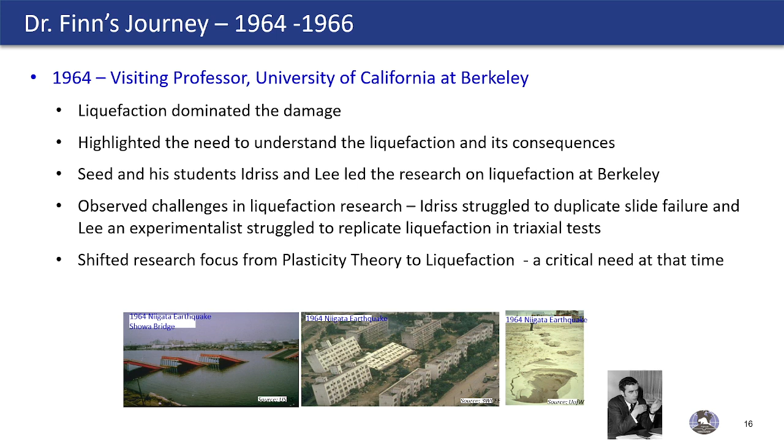So he shifted his focus from plasticity theory to liquefaction - it was a critical need at the time. He returned in 1966 to UBC, acquired funding, and commenced his research in liquefaction, establishing a soil dynamics laboratory with a shake table.

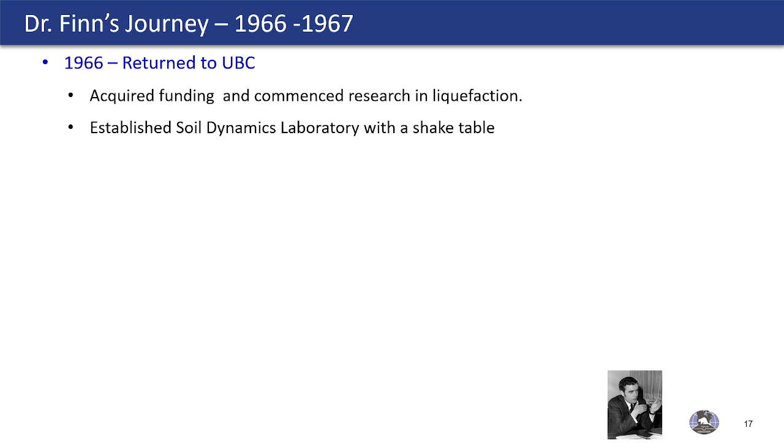In 1966-67, Dr. Finn published a paper on the static and seismic analysis of a dam using finite elements. This publication showed the power and the potential of the finite element method at the time, even with the limitations in memory and computing power compared to what we have today.

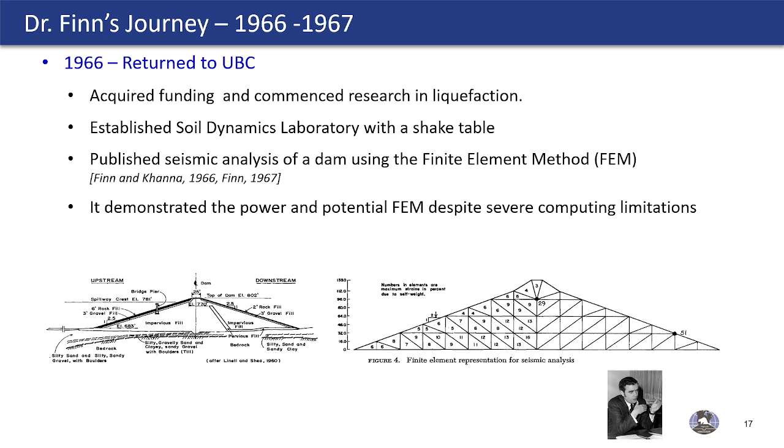That actually led him to go to the Soviet Union to work for a few months, analyzing a very large rock-filled dam which was going to be built in Georgia.

In the meantime, from 1964 to 71, at UC Berkeley, Harry Seed and his colleagues continued their work and developed these programs you're all familiar with: Shake, Quad4, and Flush. Shake is for one-dimensional site response analysis, Quad4 is for two-dimensional finite element analysis of embankments with variable damping, which was a nice feature at the time, and Flush is for soil-structure interaction analysis.

But all these programs used a total stress-based equivalent linear model, while soil actually exhibits nonlinear hysteretic behavior and also develops pore water pressure.

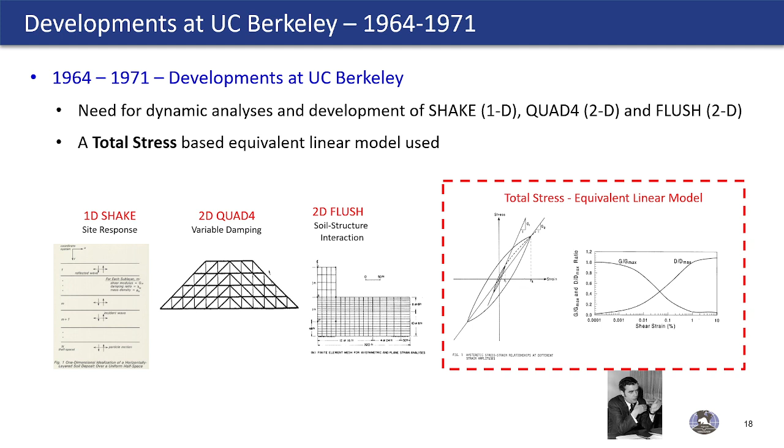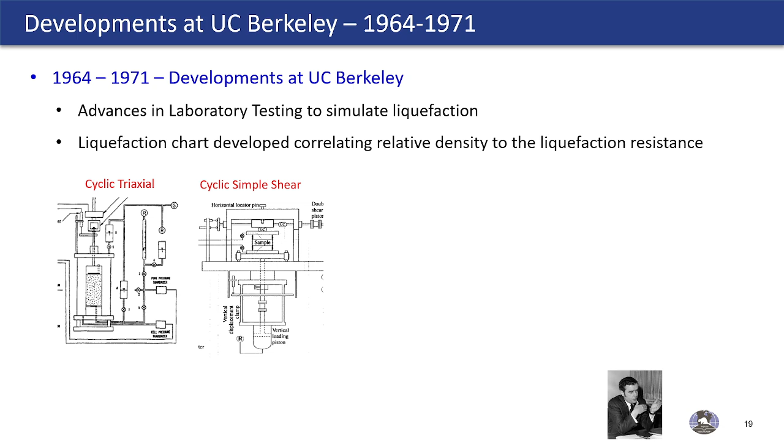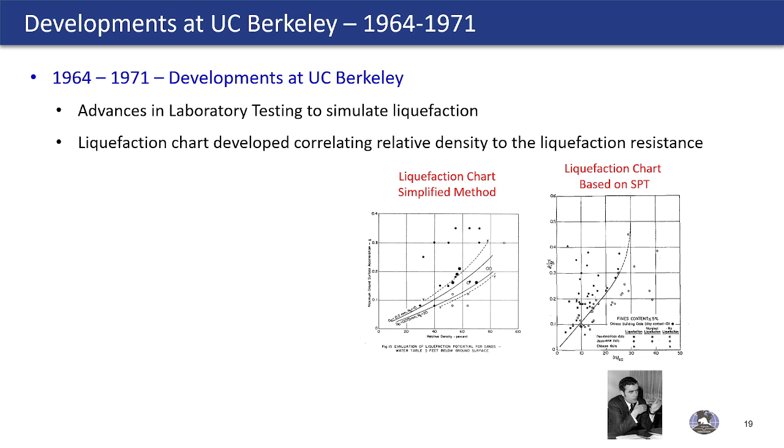At California Berkeley, they also continued their research simulating liquefaction in cyclic triaxial and simple shear tests. They developed their first liquefaction chart by relating the pore pressure ratio with the relative density, and subsequently, much later in the mid-80s, they developed their first liquefaction chart using the Seed simplified method, relating cyclic resistance to SPT N160. This was the predecessor for the current liquefaction chart.

Then came the 1971 San Fernando M6.6 earthquake. This earthquake occurred about 11 kilometers from the San Fernando Dam, which is located about 30 kilometers north of Los Angeles.

The lower San Fernando Dam experienced severe damage. The pre-earthquake freeboard of about 11 meters was reduced to only 1.5 meters, which prevented the dam breach. The upper San Fernando Dam also experienced some displacements in the order of 1 to 2 meters.

You can see on the right-hand side the configuration before and after the failure, because the significant movement caused a drop of freeboard from 10 meters to 1.5 meters.

This 1971 earthquake exposed the weakness in the total stress-based equivalent linear models. Dr. Finn recognized the need for an effective stress nonlinear model, because soil exhibits nonlinear hysteretic behavior and develops pore water pressure, and because of the development of pore water pressure, the effective stress reduces. When the effective stress reduces, stiffness and strength reduce, which causes liquefaction.

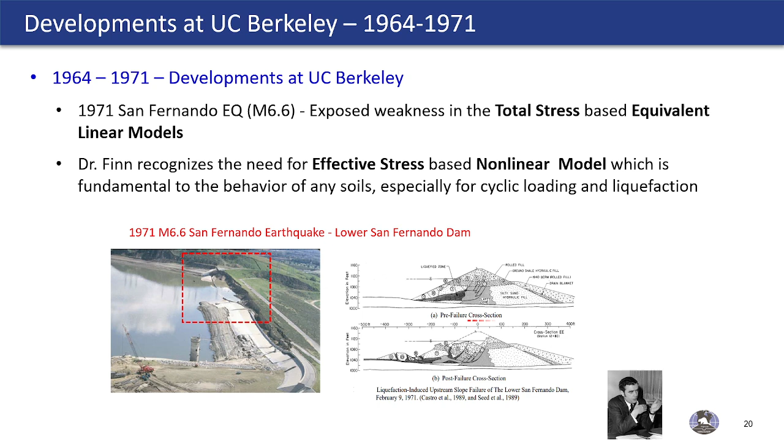So in 1975, Dr. Finn made a landmark contribution to liquefaction with the development of his model called the Martin-Finn-Seed model, or MFS model. This model can predict the pore water pressure during shaking or cyclic loading.

This was undeniably a significant breakthrough in capturing the mechanics of liquefaction and the dynamic response, something that was missed in all total stress-based equivalent linear models.

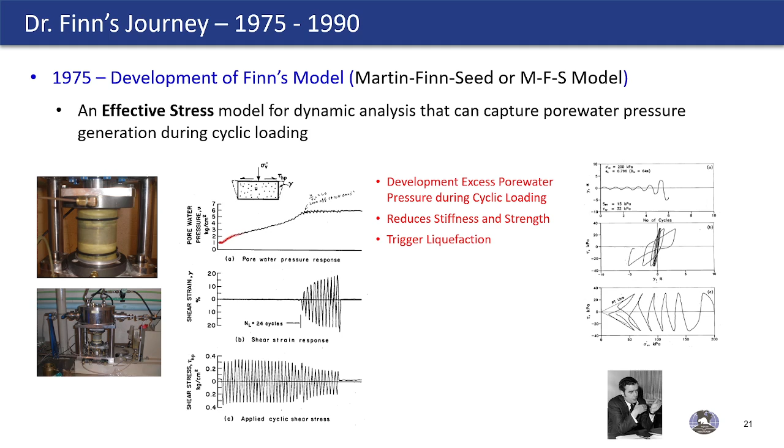Let's look at this MFS model. The first equation shows the relationship between the incremental volumetric strain, expressed as a function of the shear strain amplitude, and the accumulated volumetric strain, basically expressing the shear-volume coupling, which was captured in this equation with four coefficients, C1 to C4.

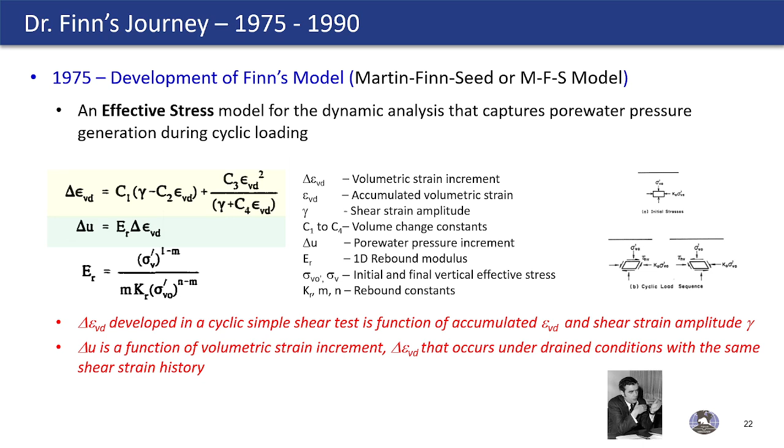The corresponding pore water pressure can be expressed as a function of that volumetric strain with the rebound modulus. It's a very simple model, but elegant, and it could capture pore water pressure generation during cyclic loading, which was important in the dynamic behavior of soils. The figure on the left shows the relationship between the pore water pressure ratio and the volumetric strain, and the figure on the right shows the number of cycles versus the pore water pressure ratio.

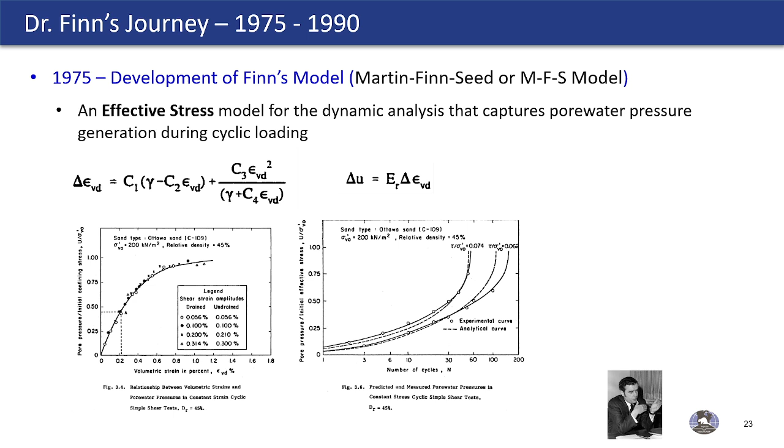So between 1975 and 1980, Dr. Finn spent time implementing his MFS model in computer programs that actually changed the practice at the time.

The first one was DESRA-2, which was developed in 1975. It can do both total and effective stress site response analysis. In DESRA-2, a hyperbolic stress-strain model was used, and the Masing criterion was used for the unloading and reloading part. Dr. Finn extended this Masing criterion to capture the irregular cyclic loading typical of earthquakes.

This figure shows a typical output from the DESRA, starting from the top: input motion, shear stress time history, shear strain time history, and the pore pressure. You can see that this particular program can capture the increase in pore water pressure and the liquefaction triggering. The figure on the right shows the stress strain loops during that earthquake loading, and you can see it is not an equivalent linear model, it is a nonlinear hysteretic model.

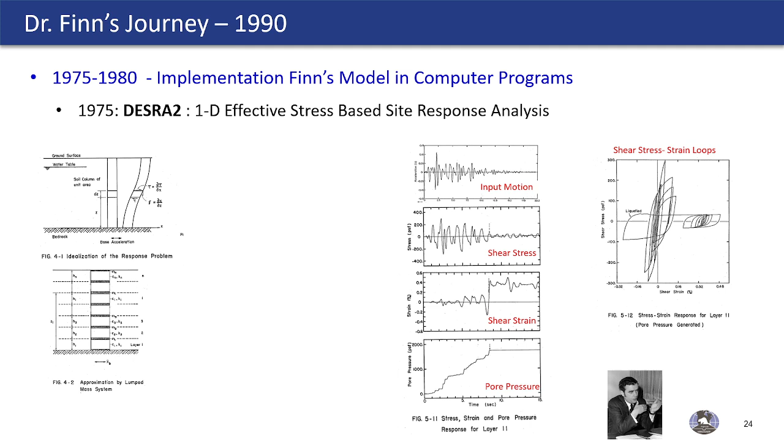In 1982 he developed TARA 1, a total stress program, and TARA 2, the effective stress program. In 1986 he enhanced TARA 2 to come up with TARA 3, with some extended capabilities.

When we develop this program and the model, it needs to be calibrated using element tests like a cyclic simple shear or triaxial, or some full-scale test or centrifuge test. This particular program was validated using centrifuge test results from the University of Cambridge.

In 1988, he developed this program called TARA 3FL, to capture the post-liquefaction, large deformation, large strain response of the embankment dam. In that one, he used a very simple model, but incorporated the post-liquefaction residual strength to capture the post-liquefaction deformation using the large strain formulation, the Lagrangian formulation.

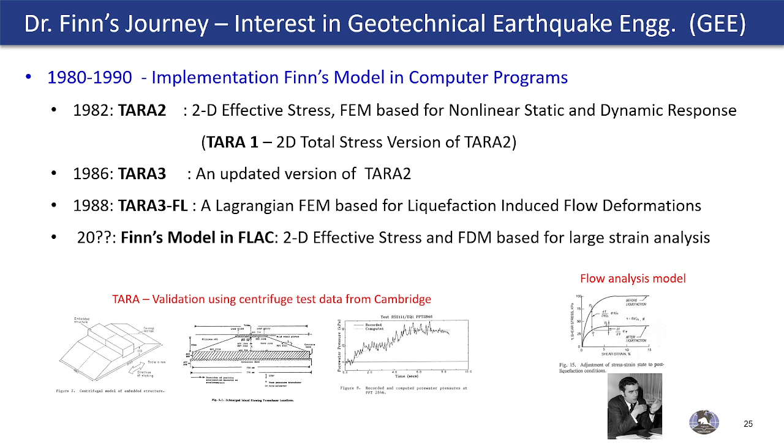Even now, we struggle to capture this large deformation or large strain, but Dr. Finn laid the foundation even in 1988. And Dr. Finn's model is available in FLAC.

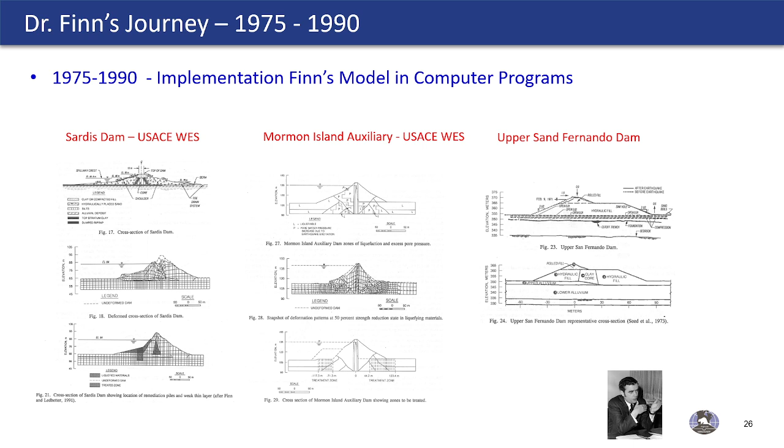He worked closely with the U.S. Army Corps of Engineers for the performance assessment of their dams, and also for retrofit or rehabilitation. On the left hand side you can see the Sardis dam, which was retrofitted by driving some concrete piles, and in the middle the Mormon Island Auxiliary Dam in California. He also simulated the damage experienced by the Upper San Fernando Dam.

He also used these programs to predict the damage experienced by the dikes in Hokkaido, Japan. He developed a very simple correlation to predict the settlement using only geometrical parameters: the height of the dike, the thickness of the non-liquefiable layer, and the thickness of the liquefiable layer. On the bottom right, you can see correlations between the crest settlement and the non-dimensional parameter, showing a blind prediction that worked well for that particular scenario and case.

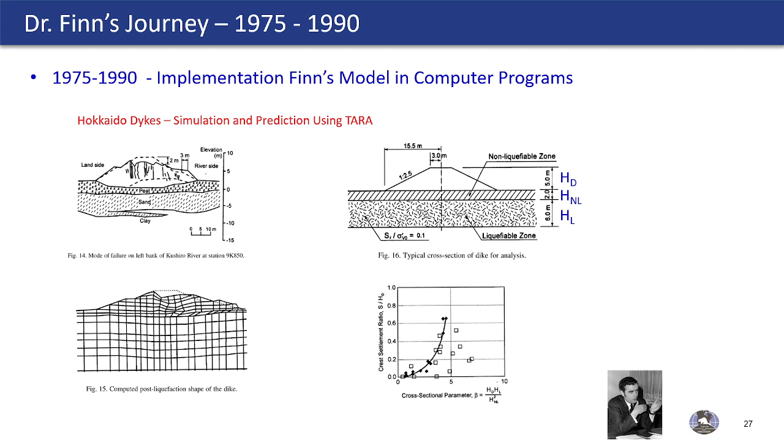So it was a kind of simple correlation - you do a fancy, more elaborate analysis, and finally reduce it to something simple. You can use it for your screening level analysis.

From 1990 onwards, his interest changed to soil structure interaction: piles, retaining walls, basement walls, and buildings in general. Jason is going to cover some of these in the subsequent lecture today. He also contributed as an active member of the BC seismic retrofit of school building project, which I believe Jason is also going to talk about.

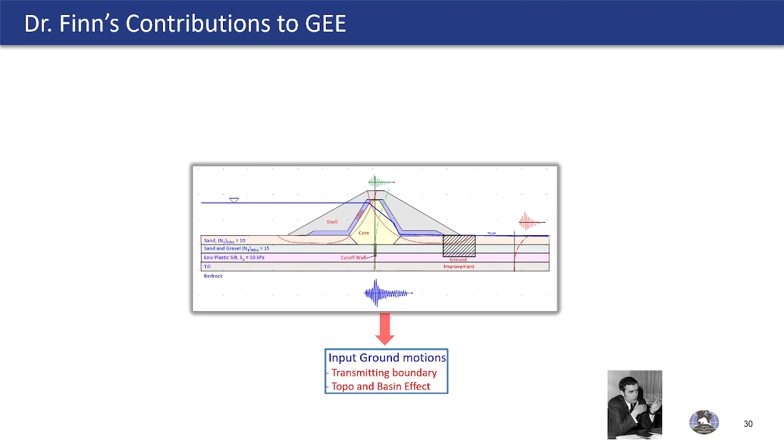Let's look at Dr. Finn's contributions. This is a typical embankment dam with some liquefiable layers, strain softening soils, and with some ground improvement. The input ground motions are important because we represent earthquake loading with the input ground motions, and Dr. Finn has contributions on the laboratory test and the liquefaction triggering evaluation.

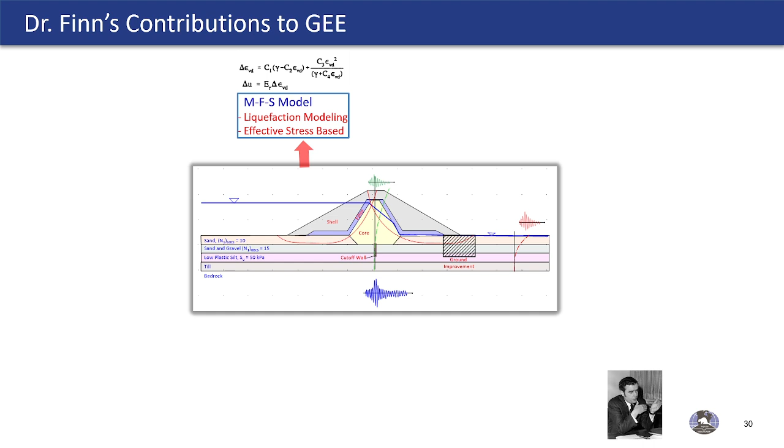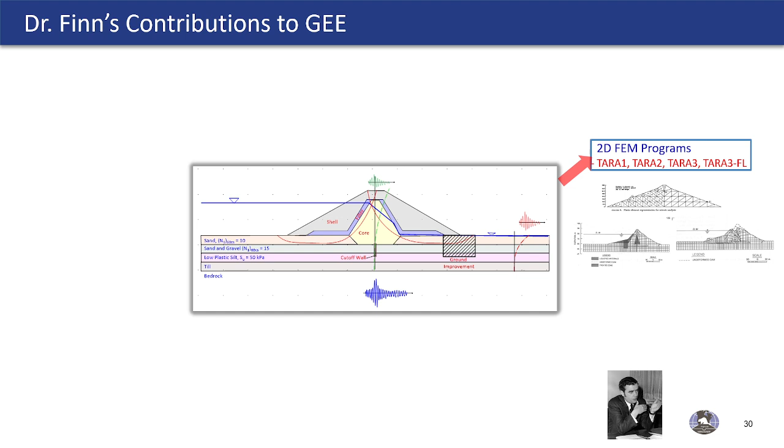He contributed a constitutive model to capture the pore water pressure response and its consequence on soil behavior, and the amplification effect through one-dimensional site response analysis and two-dimensional finite element analysis to capture the response of these earth structures, and the performance-based design we use now. So you can see he didn't leave out any subfields of geotechnical earthquake engineering - he made his mark in all these fields, and this figure shows he contributed to all of them. We can look at them one by one now quickly.

The boundary condition is very important for model analysis, and he did some work using both rigid and transmitting boundaries, because rigid boundaries are not realistic - waves reflect back into the system. Transmitting boundaries are more real, and he introduced his transmitting boundaries even in the 70s in the DESRA program.

For site response and ground motion amplifications, I already mentioned he developed the program DESRA, which can do both total and effective stress analysis, with a nonlinear hysteretic model, and he provided site amplification factors for the 2005 NBCC.

He recognized the impact of topography and the basin effect due to deep sedimentary basins even at the time, and he published some papers on that.

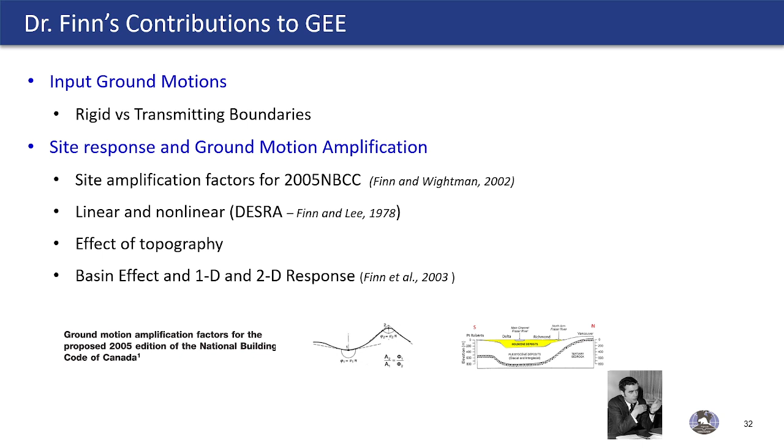On the liquefaction evaluation side, we typically use the stress-based liquefaction chart. The figure on the left-hand side was developed as part of the 1997 NCEER workshop by a group of experts, and Dr. Finn was one of the members. This chart was developed as part of that workshop, relating the cyclic resistance ratio with SPT, and there's a chart for CPT also.

In the 1980s, he developed a method using strain, not stress. The figure in the middle shows the relationship between the pore water pressure ratio and the length of the strain path. So it's a strain-based assessment of liquefaction, as opposed to stress.

In the 1980s, he also developed a program called ProLiq to do probabilistic-based liquefaction assessment. Even nowadays we still use deterministic-based liquefaction assessment, but back then he developed this program.

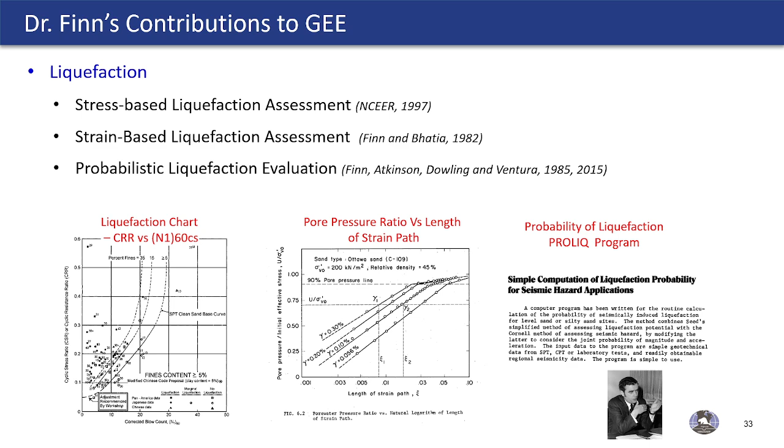At the time, the cyclic triaxial and cyclic simple shear testing were done under undrained conditions. The difference between undrained and drained, as you know, is that in drained condition we keep the valves open and let the water drain. In undrained, we close them.

When we close them, Dr. Finn recognized that there is an issue with the system compliance, including the membrane penetration. So he wanted to overcome that, and he developed or modified the UBC simple shear apparatus to do constant volume cyclic testing.

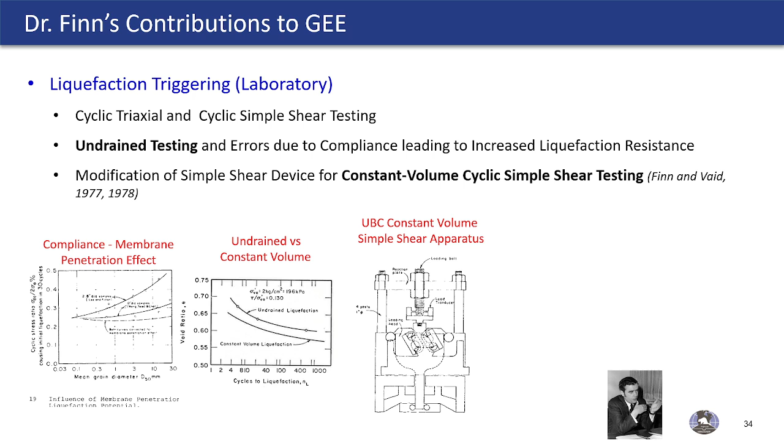This followed the constant volume apparatus, which was developed at NGI, the Norwegian Geotechnical Institute, by Bjerrum in the 60s. He used that to modify the UBC apparatus to do constant volume testing instead of undrained testing. In constant volume testing, the valves are left open, but the volume is kept constant.

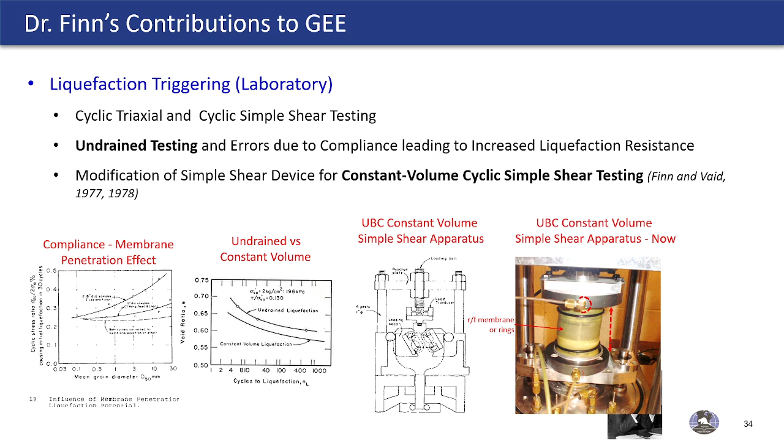During shearing, the soil grains undergo rearrangement, and that rearrangement causes a reduction in vertical stress. That reduction in vertical stress is taken as the pore water pressure. The pore water pressure is never actually measured in a constant volume test — an elegant concept, actually.

This figure shows this UBC-NGI type simple shear apparatus. Dr. Finn demonstrated that in terms of effective stresses, the behavior of dry and saturated samples are identical in constant volume tests — again, a kind of beautiful concept.

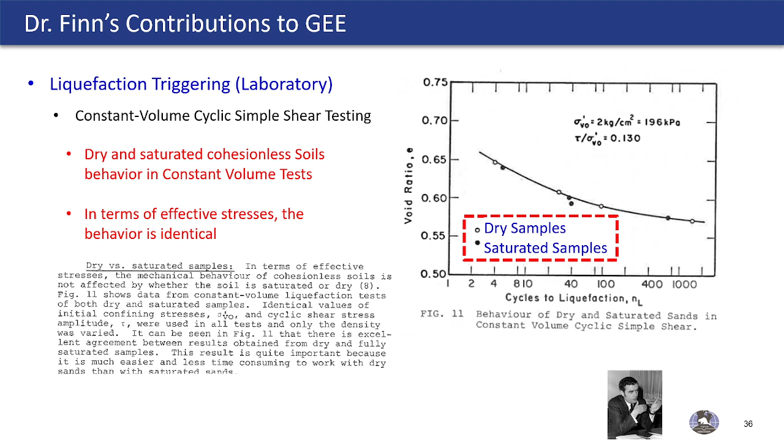He made many contributions — I already covered some of them in my previous slide. Seismic performance evaluation involving liquefaction, liquefaction triggering, and his model to capture pore water pressure, and the implementation of that in programs like the 1D DESRA and 2D TARA-3 and TARA-3FL, and the validation of some of these using triaxial, simple shear, and centrifuge tests.

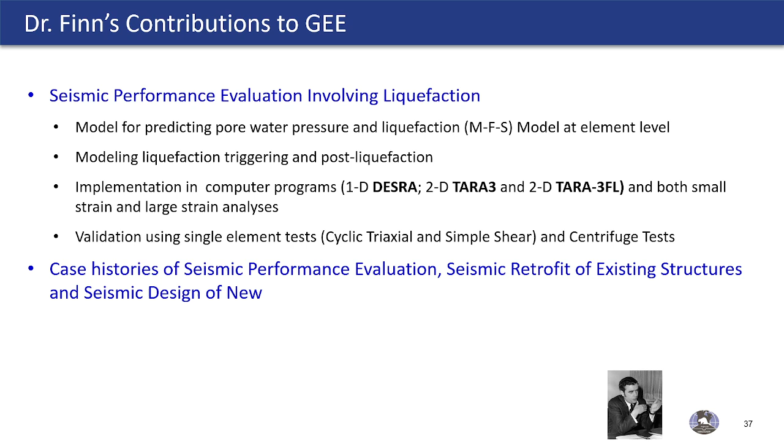He also published several papers summarizing case histories. Like I mentioned at the beginning, he didn't leave any subfield of geotechnical engineering untouched. He made his mark on ground motions, laboratory tests, liquefaction triggering, constitutive models, 1D site response, 2D performance evaluation, and performance-based design.

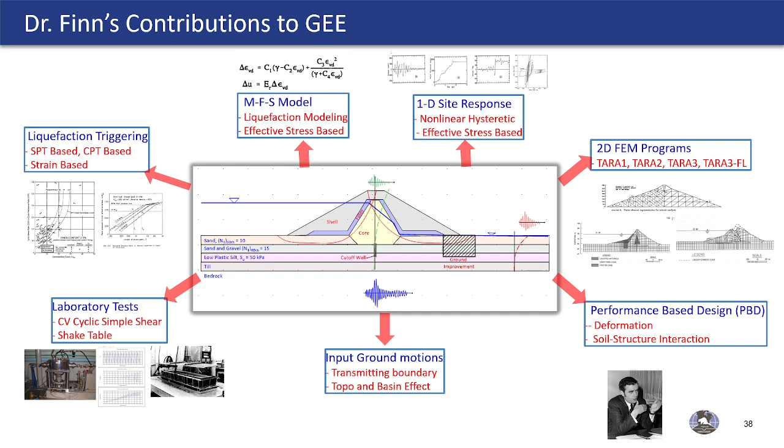Finally, some reflections on Dr. Finn. His passion for the field and the work is truly admirable. His relentless pursuit of simple but elegant solutions to tough problems is remarkable.

Usually, a good thing about these famous professors is that they will do very high-end numerical analysis and very rigorous calculations, but when they publish or present them, they convert it into something a regular practicing engineer can understand and use. That's the beautiful thing about it.

Dr. Finn also, if you read his papers, you will find it very easy to understand all these different, sometimes complex, concepts. His career shines with brilliance and global impact that shaped the discipline. His contributions continue to guide our practice and research, and he trained generations of engineers and researchers around the globe.

He is more than a scholar. He is a mentor, leader, and a friend to many. His legacy lives on through direct and indirect influence in every theory we teach, every model we use, every test we run, every structure we design, and to withstand earthquakes. His impact is woven into the very fabric of our work in one way or another. His legacy shaped geotechnical earthquake engineering.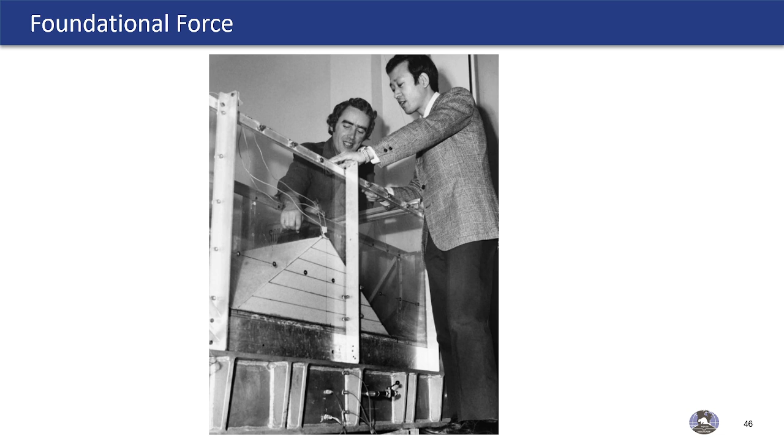He was also editor of the International Journal of Soil Dynamics and Earthquake Engineering, which I know we all probably tried to get into. On faculty since 1961, he mentored more than 40 Ph.D. students, which is an incredible legacy.

The list of honorary memberships and medals is also ridiculous. It includes the Harry or the HB Seed Medal in 2014. We forget, though, that he was actually a contemporary of Harry Seed. Seed's name is huge in geotechnical earthquake engineering.

He was a contemporary. He originally worked on plasticity, again as Thava pointed out. But the 1964 Niigata and Prince William Sound earthquakes, and then a personal invitation by Harry Seed to Berkeley, shifted his perspective and his career.

He paid strict attention to the work that Seed and Idriss and Lee, again Thava mentioned the names, were doing when he was in California. In particular, when Ken Lee had been trying to get a soil sample to liquefy in the lab, but hadn't quite managed it yet. One night something went wrong with the pulsating load apparatus. Instead of pulsating, lifting up and then unloading, something grabbed the head of the sample and pulled it up and down, turning it into a kind of impromptu cyclic load test, and the sand liquefied.

The simplified method of cyclic stress ratios caused by earthquake shaking followed pretty shortly thereafter. It's amazing to think that he was around and literally in the room when this groundbreaking and fundamental equation was being born. Site response is another method that he got involved in, and he got heavily involved in due course.

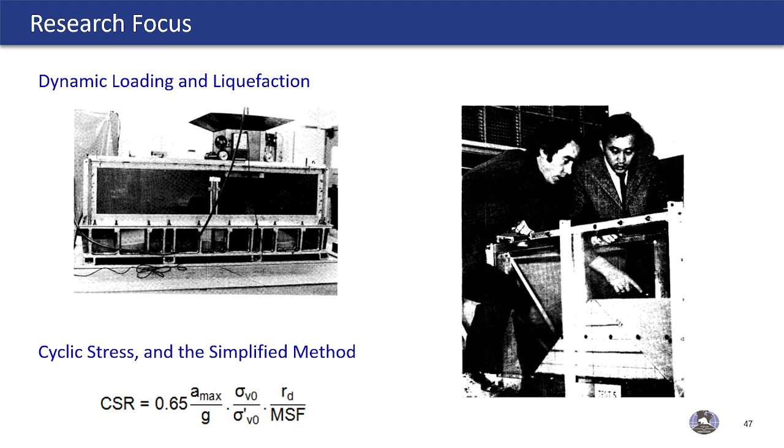He came back from Berkeley determined to get into soil dynamics and liquefaction. At the time, another problem was presenting itself: you couldn't get samples to test in the laboratory. If you tried to sample a sand that was potentially liquefiable, it densified, and so you couldn't test the sample as it was in the field.

Databases were studied, and that was one way around this, but there was another specialty birthed at the time, and that was to study the material in the lab. His research group set up the first centrifuge in North America with motion control dedicated to geotechnical research.

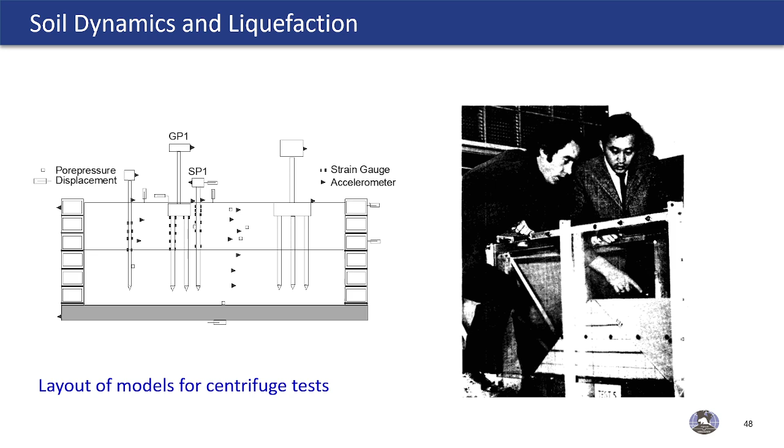He was instrumental in bringing research into UBC. Most professors at the time were dedicated teaching professors, and he started hiring research professors. He developed - this is from a magazine, the UBC magazine - a picture of him and a student, a Japanese student of his.

He developed an infamous hiring process after he was given carte blanche to travel. He would bring candidates out to dinner, and knowing that the personality of the candidates was very important, he would check how they behaved after a few glasses of wine.

While he was Dean of Applied Sciences, which he was for 8 years I think, a student of his was visiting a well-known professor in Germany. At a seminar, the student asked a group of German professors if they knew UBC. The German professors replied no, they didn't, and asked the student to name a few UBC professors.

He went through some names. They didn't recognize any, but when he mentioned Dr. Liam Finn, they all recognized the name. They did not recognize UBC, but they recognized Dr. Liam Finn. When people thought of UBC Applied Sciences, they thought of Liam Finn.

Thava spoke about the pioneering work on effective stress analysis, finite element modeling, constitutive modeling, the Martin-Finn-Seed model, and path-dependent calibration processes. 1975 represented a unique time when the state of the art and the state of practice were the same. Shake and Quad 4 were very influential programs.

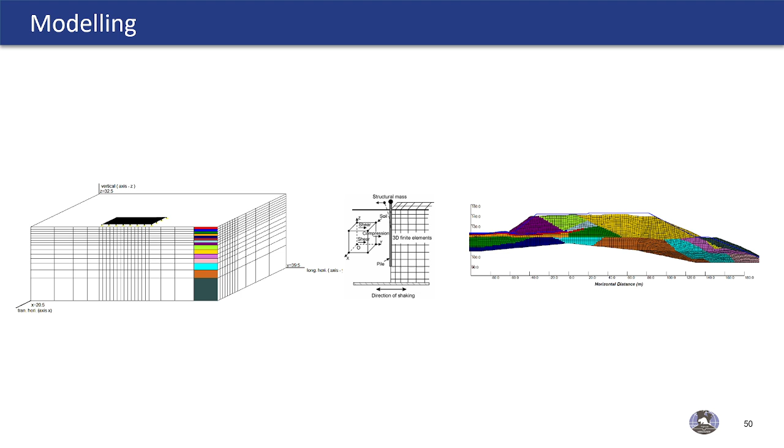But from 1975 onwards to about 2000, when Thava graduated - the young boy graduated - Dr. Finn went on to refine all these processes, including the complexities and nonlinearities in models such as Versat, Tara, Desra - I won't mention them again. He moved much faster than practice, and the gap started to broaden as Dr. Finn and his students continued in their work.

They started to use the tools that he and they developed together to analyze and study soil structure interaction and to draw some interesting conclusions. They developed very fast finite element programs that could be used to study different soils and structures and how they interacted. They showed that the common practice of evaluating pile foundation response and using pile cap motions as inputs into the models of structures such as bridges can seriously underestimate the displacements and inertial forces.

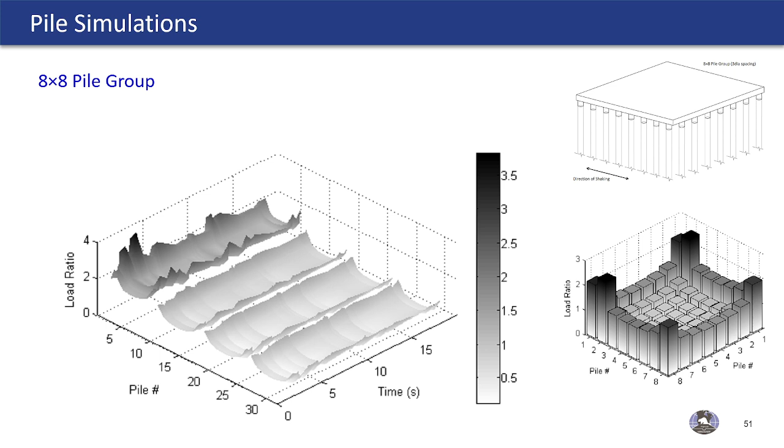In such cases, coupled analysis or soil structure interaction is necessary. The effect of stronger levels of shaking is to widen the gap between the loads carried between the interior and exterior piles. These are some of the figures he and his co-workers generated.

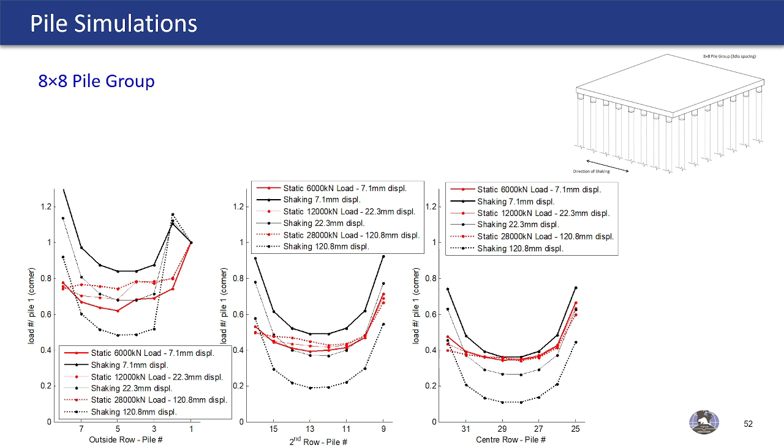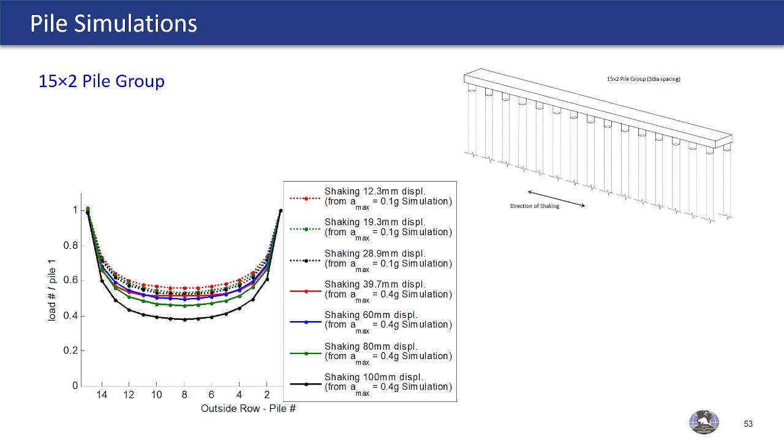He found interesting results as part of this work: for certain frequency intervals in the dynamic loading, the piles closer to the center actually take a larger portion of the load, with large dynamic amplification factors expected for these piles in the center. The effect of stronger shaking is to widen this gap between the loads carried by the interior and exterior piles overall, and the results hold for longer bent-shaped bridge piers, such as this one.

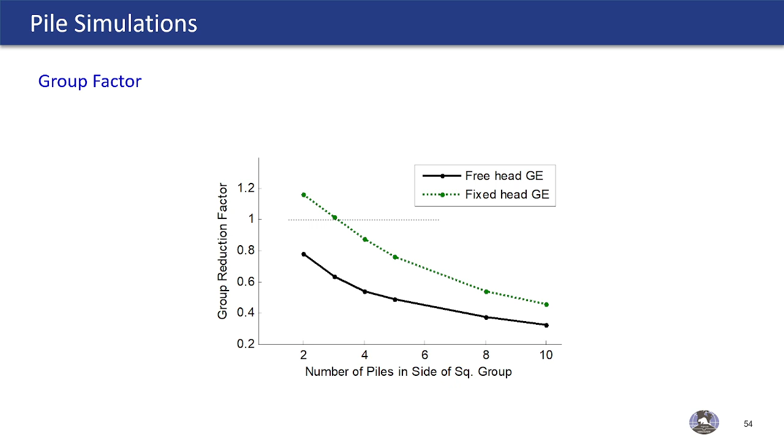He noticed two results not previously reported. The difference between free head and fixed head condition is quite pronounced here. The other striking difference is that in the case of 2x2 or 3x3 pile groups, the group factor actually increases, and the groups provide more resistance than the sum of their individual contributions, indicating the smaller piles in the pile cap exert a disproportionately large influence.

Dr. Finn was instrumental in the BC Schools project that Thava mentioned. I'm sure quite a lot of people in the room have worked on it, and I know some of you for sure have. It involves analyzing and retrofitting the BC schools, around 800 or so, with an estimated cost in the billions.

UBC were engaged by the Ministry of Education to conduct geotechnical and structural research into retrofitting the schools, to come up with efficient, cost-effective solutions. They set up a technical review board to ensure the retrofit guidelines were followed, and Dr. Finn was a big part of that process for a very long time. His work was involved in many different streams of research as part of that project.

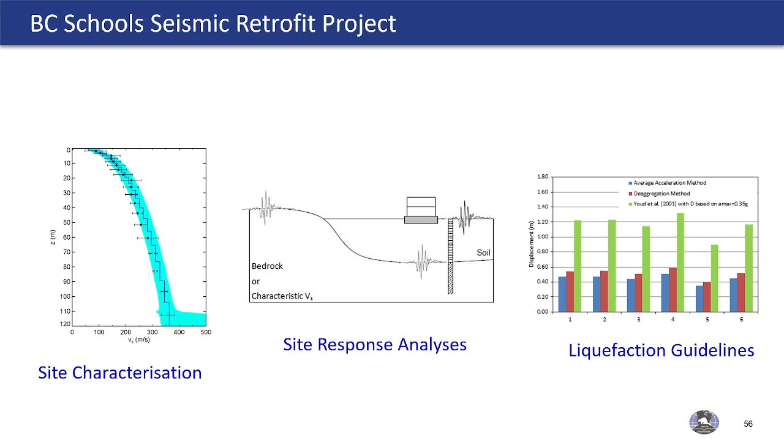This starting with site characterization, site response analysis, lateral spreading, and soil structure interaction. He developed simplified but rigorous methods of evaluating liquefaction potential and lateral spreading based on other work at the time, and updated them for probabilistic ground motions, which were used in the project.

With such a large inventory, the team had to prioritize cost effectiveness. Site characterization was, of course, part of the work, but because of the large number of sites, they looked at ambient vibration, which was a lot cheaper than other invasive methods. The figure on the left shows the blue band with the step line in the middle, the average results and standard deviation from ambient vibration results. The system takes dispersion data that they developed together, runs Monte Carlo simulations to output the mean and standard deviation. In the same figure, the solid circles are SCPT data points, and hollow represent, I think, downhole data for comparison. The results were within 5 or 10% and at a fraction of the cost.

The figure on the right shows a similar study comparing where the yellow dots are ambient vibration results.

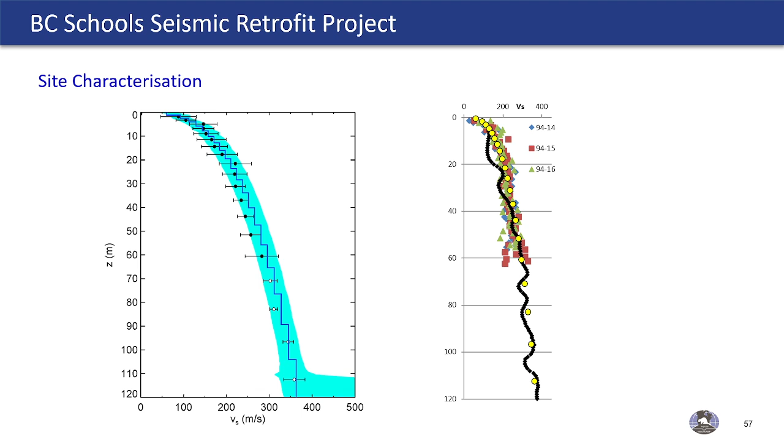Site response analyses were conducted as part of that work too. Empirical shear wave velocity depth relations and site data were used to generate large data sets incorporating uncertainty. Monte Carlo simulations again were used to vary site parameters and determine the response at the surface, considering very little data.

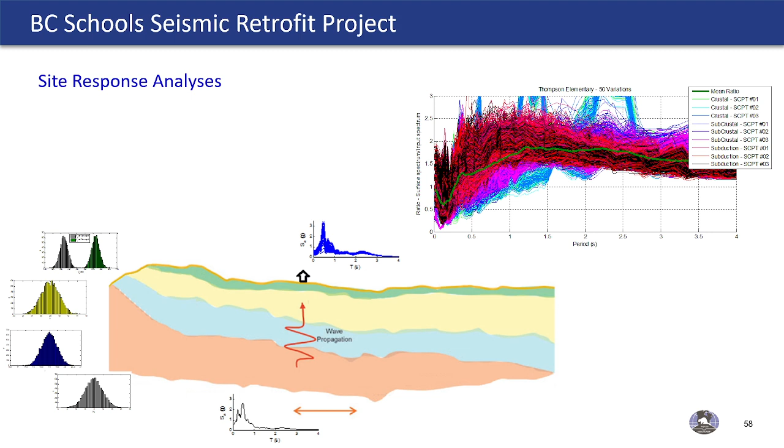Dr. Finn led the team in developing early versions of the liquefaction guidelines, which are used as part of that project. The torch is probably passed to someone in the room. The document provided liquefaction advice, liquefaction factor of safety, settlement, lateral spreading. He proposed methods of estimating displacements based on Youd's method, which I'll cover on the next slide. The document provided commentary on liquefaction drift limits as they relate to components of drift in liquefaction - the residual drift, the horizontal demand, and the vertical settlement demand.

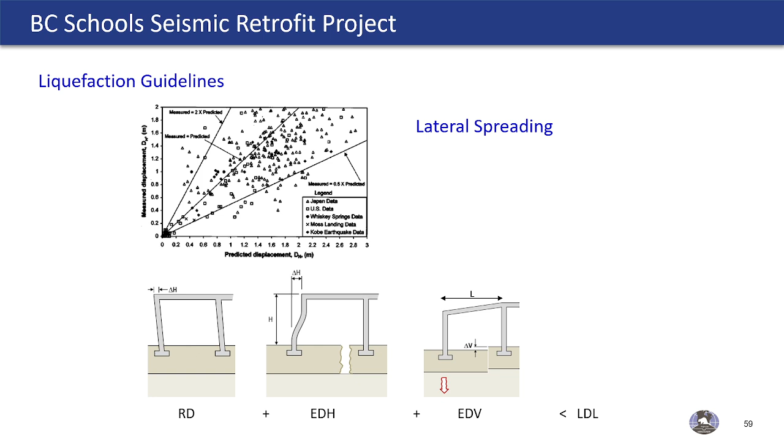He proposed methods of estimating lateral spreading, based on Youd's method I mentioned. We have the equation there, Youd's equation. The method includes the chart for site class D for different magnitudes. It provides the average acceleration as a function of distance from, I think, 3 attenuation laws. It was in Youd's paper.

The question is, what do you do with probabilistic ground motions? He proposed 2 methods of dealing with this. The first was using the deaggregation from Natural Resources Canada, which gives bins of magnitude distance pairs and their contribution to the hazard. In the figure on the bottom left, you calculate how each of these pairs contribute to that acceleration demand, and then you sum them up. Adding horizontally takes care of the contribution for each magnitude, and adding the column gives the total displacement.

So using probabilistic demands now, the second way of doing it is to use a hazard program directly. And if you were at UBC, you know Dr. Finn taught 504, which used probabilistic seismic hazard analysis tools. The work is done by calculating hazard acceleration with an epsilon of 0, so no variation about the mean. In Vancouver, the average epsilon might be 2, for example, so 2 standard deviations above the mean. These 2 methods give similar results, shown in the bottom right, compared to another result where you use the full acceleration at the site.

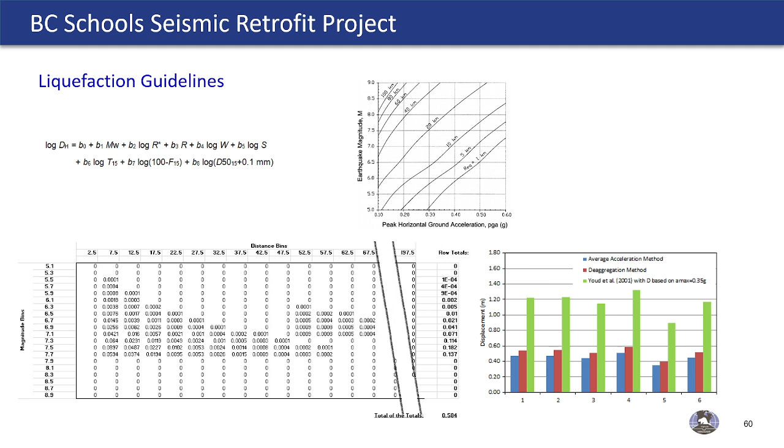Dr. Finn spoke many languages, including Russian, as Thava mentioned. He spoke it so well, in fact, he could pass for a social sciences professor. He lived in Russia for a while after being invited to give some lectures there and work on that dam that Thava mentioned. A local radio station once booked him for a telephone interview.

Taking the call at the scheduled time, he started chatting away to the host in Russian. He was a bit surprised by the social sciences question - he was expecting earthquake or geotechnical type questions - but towards the end, he realized that the interviewer had actually confused him with a social scientist professor and booked the wrong person. He winged it, so the interviewer could save face, and they were quite happy with his answers. He was fluent enough to speak on Russian radio in a field that wasn't his.

He could also speak Japanese. He traveled to Japan with the Canadian delegation after the 1995 Kobe earthquake.

The park was closed, but he spoke to the park attendants in Japanese, describing them as visiting earthquake experts.

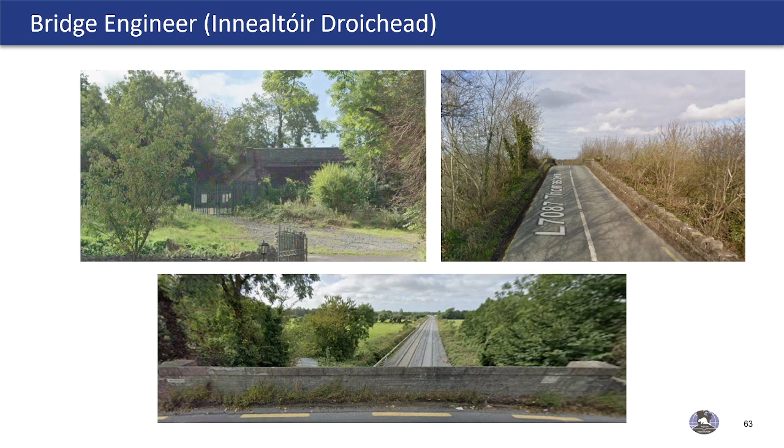After that, he added the extra reminder that he signs their time cards, and they very quickly started putting in very hard-working shifts. This bridge still exists and is still standing today.

He has a great sense of humor and makes stressful days much easier. Despite his incredible intellect, he remains infinitely approachable and warm. He's responsible for where I am now, and for so many other people probably in this room. For many of us who are lucky to get to know him and into his orbit, we feel grateful and proud to have worked with him and to call him a friend. I hope I haven't done too bad a job of sharing a little of his immense character.